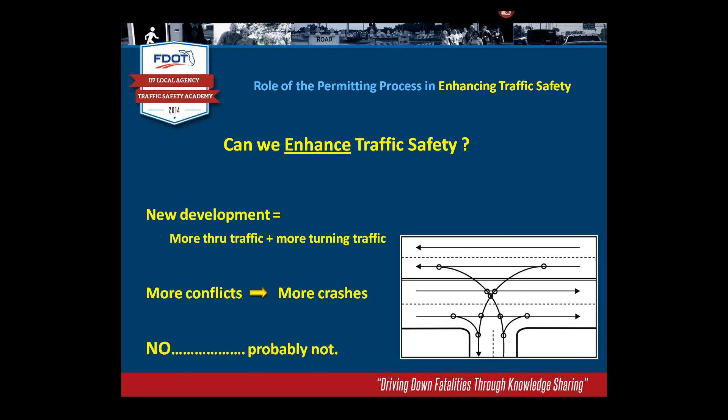So it's going to be difficult to improve on traffic safety during the permitting process, so we probably can't do that. But certainly we should be able to mitigate the impacts of new developments on traffic safety. And the way we do that is addressing the access management features that go into a development's access. The driveways, for instance: determining the right number of driveways, the proper location and the proper design of the driveways; turn lanes, whether or not turn lanes are warranted, and if so, how long they need to be.

We need to address median openings. It might be that we need to adjust a median opening, change it from a full median opening to a directional, or possibly close a median opening. We may need to close a median opening so that we can lengthen that left turn lane. Maybe it's just adjusting a median opening or relocating it a little further away or towards the development.

In Florida, whenever we affect median openings, we certainly want to make sure that the businesses and the property owners are aware of the median opening change. So we contact the property owners, and actually in our district we put up a little sign at the median opening so that folks know there's going to be a change there, and they have the opportunity to call and talk to us about that change. And if the development's large enough and generates enough traffic, maybe a traffic signal is the proper design feature that needs to be added to the roadway.

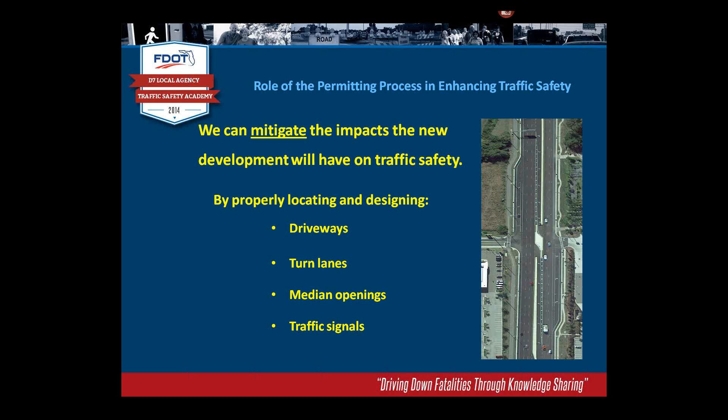So how do we go about mitigating the impacts? Well, we have to have a plan, and the plan we use typically is the traffic impact study. So one of the major topics today is traffic impact studies. And after the traffic impact studies, I wanted to go over how you can find some of the DOT references we're going to be talking about today. That won't take too long, but I will go through these references so you can find them easily.

And then the last little section, I call it Stung by the Standards. I'm not sure if that's the proper title or not, but it's really just some observations I've made over the years and some thoughts I have about some of the access management features, and I'll spend a little bit of time talking about those. This last little topic is really for your consideration. Again, it's really thoughts that I have.

So the first topic is the traffic impact study, and if you work for the DOT, as far as I know, we only have two documents that really speak to traffic impact studies.

The first, I've already mentioned a little bit, is Rule Chapter 14-96. If you're not familiar with the Florida Administrative Code, it has a number of divisions within the code, and division number 14 are the DOT, the Department of Transportation numbers. So anytime you see an FAC 14, that's going to be a DOT rule chapter.

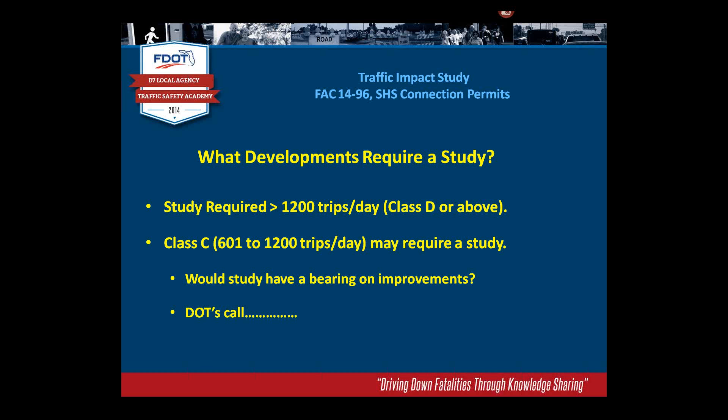The rule chapter also mentions the Class C permits, which are permits where the daily trips are between 601 and 1,200 trips a day. And you can require studies for the Class C permits, but we usually don't. We really haven't found them to be beneficial at all. But it is the DOT's call if you think there's some benefit that you can gain from those particular studies. And the rule chapter also talks about signing and sealing the studies.

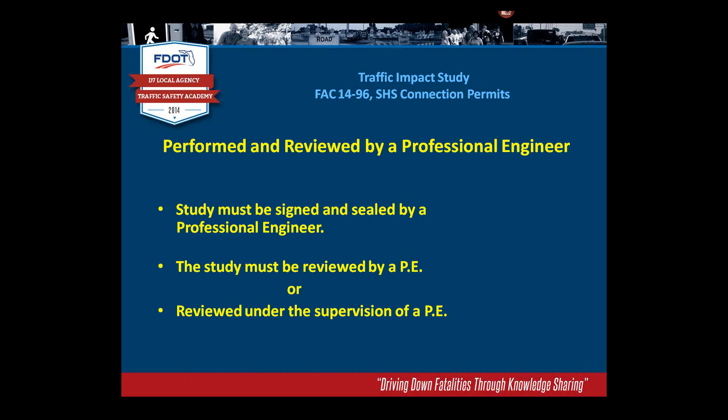The studies have to be signed and sealed by a professional engineer. After all, they are a traffic engineering study. And since they're signed and sealed by an engineer, the rule chapter also states that they're supposed to be reviewed by a PE. If they're not reviewed by a PE, then the study should be reviewed by someone under the supervision of a PE. Pretty much common knowledge, but that is specifically mentioned in Rule Chapter 14-96.

There's a little bit of information on trip generation. When the applicant submits the driveway application or connection permit application, he has to show the estimated number of trips on that application, and he has to show us which land use code from the trip generation manual he used. So that's good information to know. And again, the information on trip generation does mention the ITE Trip Generation Manual. I'll talk about that a little bit later on.

It also tells the applicant that when they're estimating the traffic, they should estimate the peak hour trips too. Usually the peak hours are going to be the morning peak hour and the afternoon peak hour. They should provide those estimates not only for the peak roadway times, usually the morning and the afternoon, but also the peak times of the development. Sometimes they're the same, sometimes they're not. So it's good to identify up front what information, in this case, the DOT will require from the developer, and we'll mention that a little bit later on too.

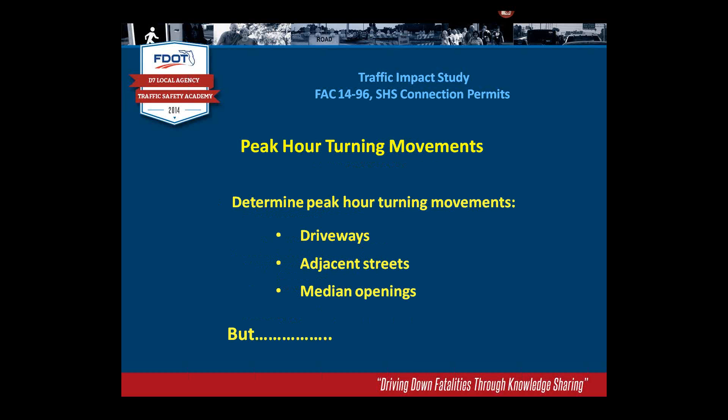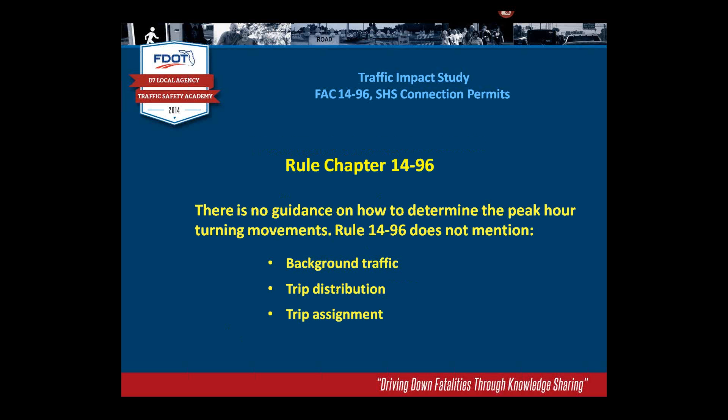And really the last bit of information that's required from the traffic impact study, according to Rule Chapter 14-96, is the applicant is required to determine the peak hour turning movements for all the critical locations or intersections. So that would be the driveways, the median openings and the adjacent streets. But this information really isn't very detailed, and it never tells you how to even collect this peak hour turning movement information. There's really no mention of the background traffic or the existing traffic at these locations. No mention of the trip distribution or trip assignments. So in that regard, it's certainly lacking information, and it would be very difficult to complete a traffic impact study with the guidance that's in Rule Chapter 14-96.

As far as analysis and mitigation, I'll just read this, but the only time it's mentioned, it states that the study must include a traffic operations analysis of sufficient depth to analyze the impacts of the development on the surrounding transportation system. Well, that sounds good, but what does that mean, and how do you go about analyzing that information? So we really need more guidance.

Fortunately, we do get a lot more guidance, at least on the determination of the traffic volumes, in the planning document, the Transportation Site Impact Handbook. This handbook covers a lot more than just the permitting that we're talking about today, but it does have a good chapter on traffic impact studies, with a lot of detail on the data collection and estimating the traffic volumes. But when it gets to the analysis and the mitigation, it really doesn't offer a whole lot. But I would like to go through the steps that are in the Site Impact Handbook.

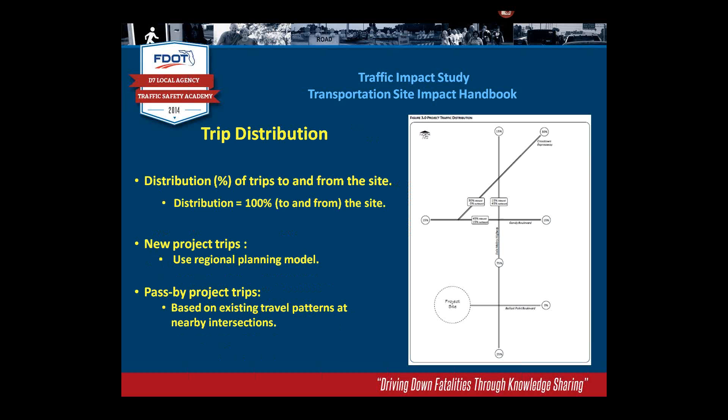So when you get through with the trip distribution, you should have something similar to the drawing you see on the right-hand side that shows the percentage of the trips and where the trips are coming from and where they're going to. Now, after you have the trip distribution and you have an estimate of the number of trips generated by the site, use that information to come up with your trip assignment. And this is the project traffic.

So you determine what the project traffic is going to be for each of the turning movements at each of the critical locations. So you determine the turning movements then for the driveways or individual driveway, the median openings that might be affected, and also the intersecting streets. And once this step is completed, then you should have a drawing that pretty much shows all the turning movement counts and the impact that the traffic only generated from the site will have on these intersections.

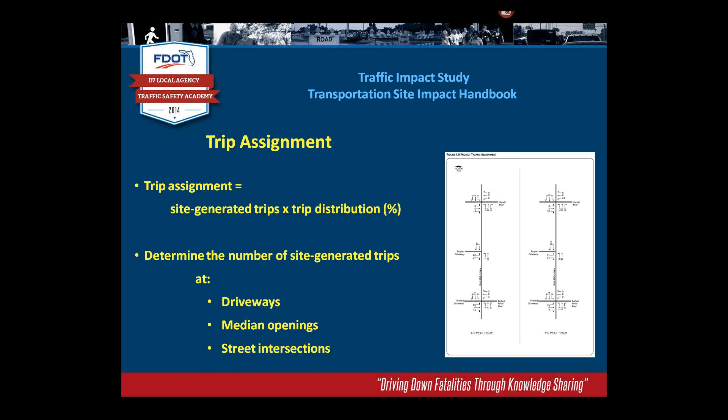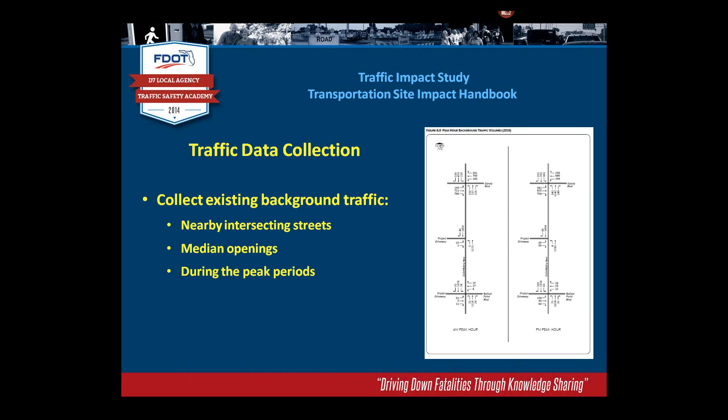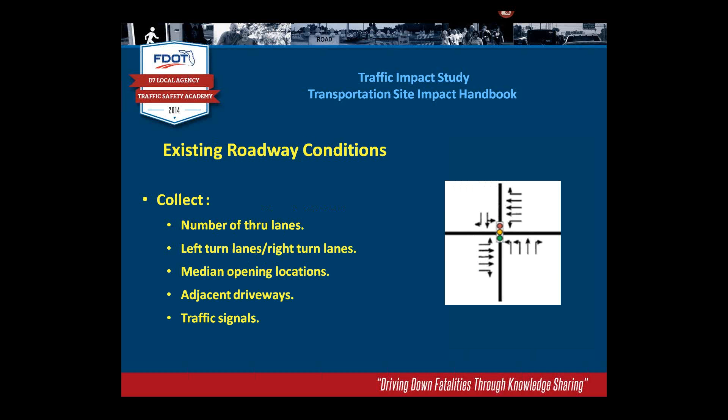Other information you'll need in order to be able to complete your analysis, you need to collect the existing roadway conditions. So you need to know the number of lanes along the roadway, if there's left turn lanes, right turn lanes, how long the right turn lanes might be, how long the left turn lanes might be, where the median openings are located, the distance from adjacent driveways to the proposed driveway or driveways, and the location of the adjacent signals in the area.

And that's really the last step in the Site Impact Handbook that frankly is of any real value. There's two other steps. One of them is called the Access Management, Site Access, and Internal Circulation step. Basically, it tells you that you need to assess the safety and operational impacts of the development, but again, doesn't really tell you how to do that. Just tells you it needs to be done. And then the last step in the Site Impact Handbook is the step on mitigation. And there again, it pretty much tells you that if you got a problem, you need to mitigate that problem. But it really doesn't tell you how to do that.

So reviewing the Transportation Site Impact Handbook, again, and I won't repeat this more than one more time, very little guidance on analysis and mitigation. And in fact, it missed another step, or at least I never could find this step. It's an obvious step, but I never really could find the step where you would want to combine your background traffic with your site traffic so you'd have your total future traffic at each of the critical intersections. That's pretty much understood, but I really couldn't find it anywhere in any of the steps in the Site Impact Handbook, so you just maybe need to be aware of that.

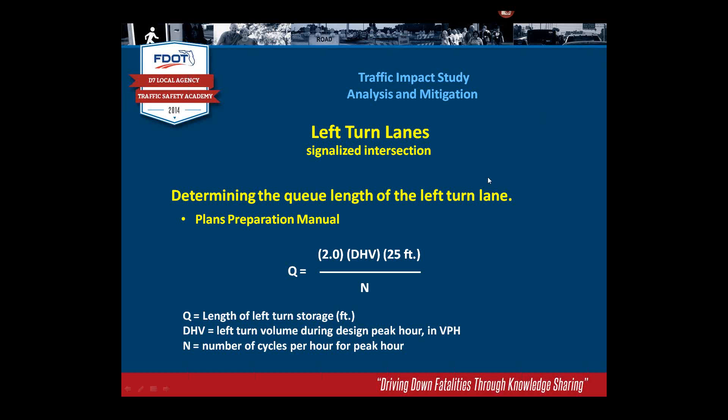and you say then that the queue length for storage needs to be the number of feet of a typical vehicle, 25 feet, times the number of vehicles. In this case, we won't do the math right here. I was going to do it actually on the next slide. But you multiply the number of vehicles times 2, and then multiply that by the 25 feet to get your queue length. I suffered through that. I should have just gone straight to this example.

Yeah, here in this example, it's called the DHV, the design hour vehicles, but we're talking about left turn vehicles. So in this case, we're going to assume there's 100 left turn vehicles during the peak hour, and assume that the cycle length is 180 seconds per cycle. If you divide the number of seconds in an hour, 3,600 seconds, by the 180, then you'll come up with 20 cycles. So 20 cycles is your N value. You divide the 100 by the 20, so that means there would be 5 vehicles arriving every cycle.

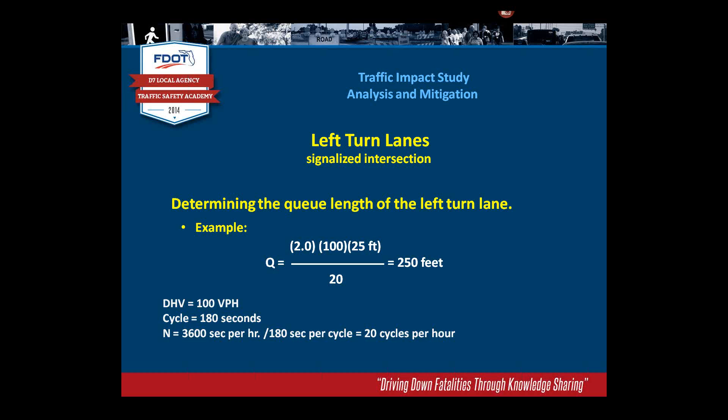And then to be on the safe side again, go ahead and double that. So that's 10 vehicles. 10 vehicles times the 25 feet per vehicle is 250 feet. So in this example, the queue length would be estimated at 250 feet. And that's for a signalized intersection.

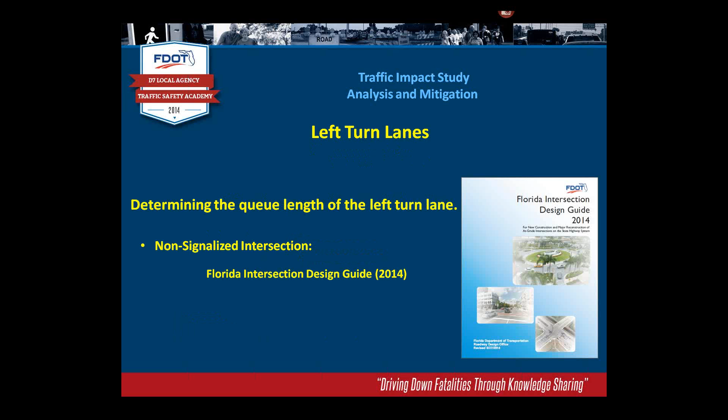Now for a non-signalized intersection, the Florida Intersection Design Guide has a formula, again, that's easy to use. And from what I know, most people seem to use this formula. And this formula is based really on the number of left turn vehicles that arrive in the left turn lane within a 2-minute period. So the formula then is the design hourly vehicles divided by 30, which is the number of 2-minute periods there are in an hour. That'll give you the number of left turn vehicles per 2 minutes, multiply that by the 25 feet per vehicle, and then that gives you your queue storage.

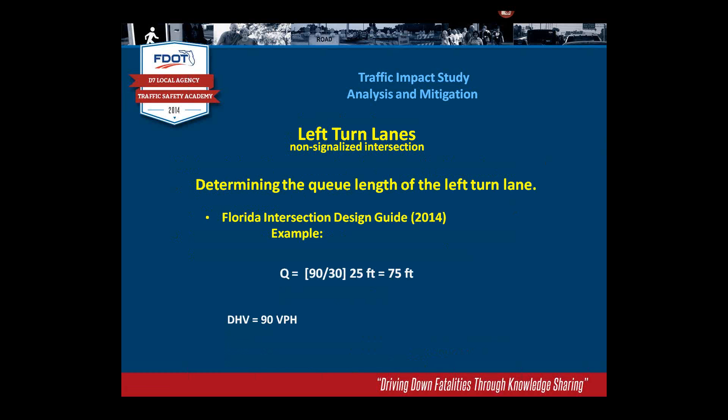Again, an example of that might be, let's say we've got 90 vehicles that are making a left turn at a median opening. That would mean in a 2-minute period, 90 divided by 30 is 3. There'd be 3 vehicles making that turn. So you multiply the 3 vehicles by the 25 feet, and so you use a queue length of 75 feet. Now, I didn't go into the decel and the taper on the left turn storage lengths. Obviously, we'd go back to standard index 301 and go through the same process we did for the right turn lanes to come up with the total left turn lane length.

So that pretty well covers, I guess, our analysis of right turn and left turn lanes. Just like to make a few comments about median openings. There's no real warrants for median openings. Certainly we have our design spacing standards, and we want to try to follow those standards wherever we can. But ultimately, our decision really needs to be based not necessarily on the numbers, but on sound engineering judgment, experience, whether or not motorists will be safer, and whether or not it'll be more operationally efficient to have a median opening or not, or to relocate the median opening or not.

For me, if there's no full median opening and somebody's asking for a full median opening, I try to stay away from new full median openings. If there happens to be a situation where we know we're going to have to signalize the new median opening, well, certainly you're going to need to put in a full median opening, but I generally want to stay away from full median openings that don't exist today. And the option a lot of times to me is the directional median opening. We'll talk about that a little bit later. In fact, I think it's about the last thing I talk about today.

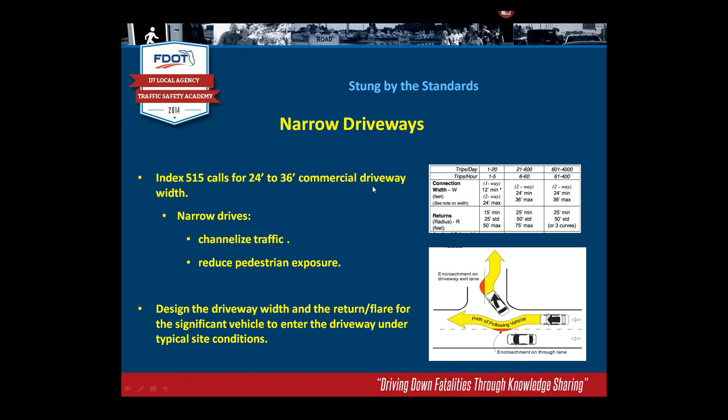And there's good advantages, really, with keeping the drives relatively narrow. You're able to channelize the traffic a lot better. You're able to reduce the exposure pedestrians might have while they're crossing the sidewalk. That's all good. But sometimes we run across some conditions that really just aren't typical. And frankly, I had to frame this particular example. I couldn't find any of these conditions. We've had the conditions discussed during design, but I don't know if we've really constructed any. But just wanted to make you aware of this.

The typical site conditions that you see in a lot of our manuals and maybe presentations that you've seen, they're usually perfect. I mean, usually the site is a perfect square, perfect rectangle. It's plenty large enough for all the features that need to be within the property.

And that's the way it is most of the time, but there's plenty of times that folks try to fit businesses on properties that frankly just are too small, or it's an odd-shaped piece of property. And so that creates a lot of circulation issues, and then also creates issues maybe with the throat depth. You might hardly even have a throat depth because of the way the property is designed.

And so, for instance, in this particular example, and this is something that had come up on some design projects, you've got the fueling stations very close to the right-of-way, and the aisle between the fueling station and the right-of-way is very narrow. And for a vehicle to come out, if they come out and pull up far enough, they're probably going to be out of the way if you have a 24-foot drive.

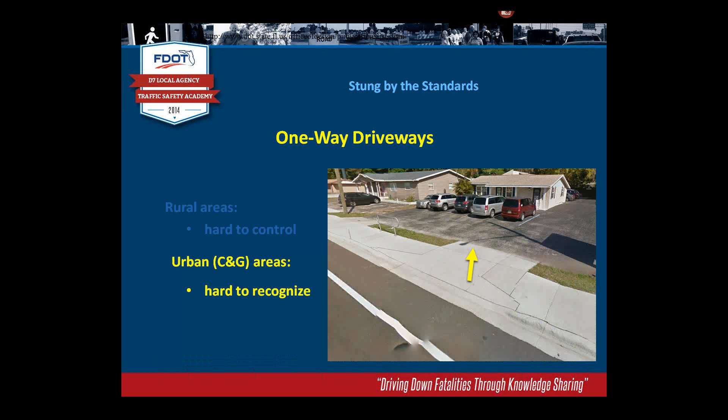And then obviously this driveway doesn't have any of the signs or pavement markings that should go along with a one-way driveway. The driveway next to it, to the left, is supposed to be a one-way driveway too, a one-way out. And obviously it would be impossible for people to really recognize it that way.

The concrete pork chop island, don't really need to say a whole lot about it. They're supposed to discourage left turns into driveways, left turns out of driveways. If you do not have a restricted median, if you don't put in the concrete island, you can put in the painted island, and probably you'll even get less people paying attention to what you want them to do, to stay away from the left turns in and left turns out.

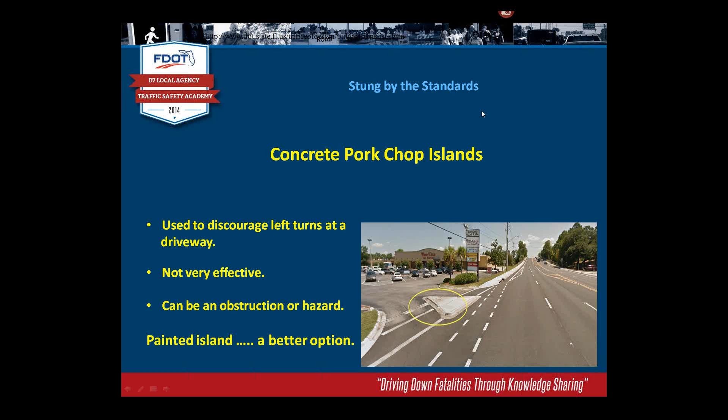And then the next features I wanted to talk about were the continuous right turn lane and the separate right turn lane. If I had my preference, I'd always use strictly just the separate right turn lanes. But we have conditions out there that, at least in my opinion, maybe the continuous right turn lane is a better option than the separate right turn lanes. Regarding the continuous right turn lanes, I know some references discourage their use.

The only thing I remember reading about the continuous right turn lanes is that you may encounter situations where motorists get into the right turn lane, have their turn signal on, and the motorist coming out of the next driveway thinks they're turning into their driveway, so they pull out and they get hit with a right angle crash as they pull out. The vehicle with their signal on was actually intending to go up to the third driveway or a driveway further away. I guess that's always possible, and maybe it happens, but I'm just not aware of it happening, or really even happening a lot for that matter.

But I am aware of some conditions that we've had with separate right turn lanes that really made life difficult. In fact, there's been several locations in northeast Florida I know where we've had enough problems that we had to eliminate those problems. So with the separate right turn lanes, what we have encountered is that you'll get motorists entering the first right turn lane thinking they're going to the second right turn lane. And then when that happens, they'll do one of a couple of things. First of all, as soon as they realize they're in the wrong right turn lane, they'll dart back out.

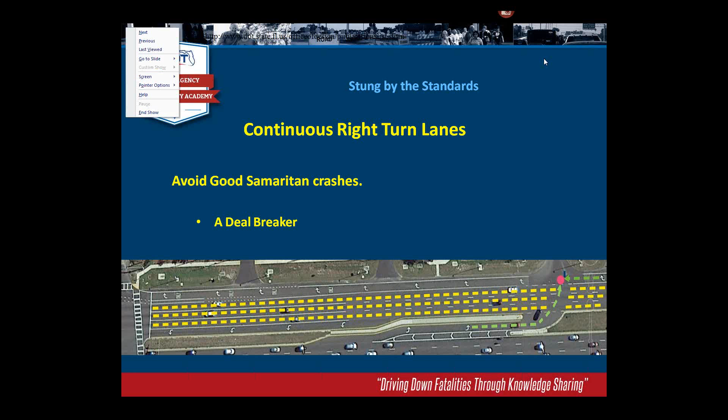Now, the next item I wanted to talk about really was non-standard length turn lanes, either left turn lanes or right turn lanes. I know from time to time I hear folks say that they won't install anything or won't allow anything except the standard length turn lanes. And certainly that needs to be our first option, our first consideration. But plenty of times, for a variety of reasons, we cannot install the proper length turn lane.

It might be within a median where you want to lengthen a left turn lane or install a left turn lane, and you just can't get the 185 feet maybe plus the queue that you might need for a 45-mile-per-hour speed limit. So you put in what you can. I mean, ideally you put in the entire left turn lane length as required using the proper queue and Index 301. But if you can't do that, at least it's nice to try to get the queue length in. That way the through traffic won't be running into the back of the last stopped vehicle.

And even if you can't get the queue length in, especially for the right turn lanes, if it's smaller, we'll accept a smaller right turn lane in our district if the turn lane lengths don't meet the design standards. Now, the engineer of record, the engineer working for the applicant, is going to have to come in and write the design variation. And as far as I know, every time one's been written, it's been approved by the district design engineer.

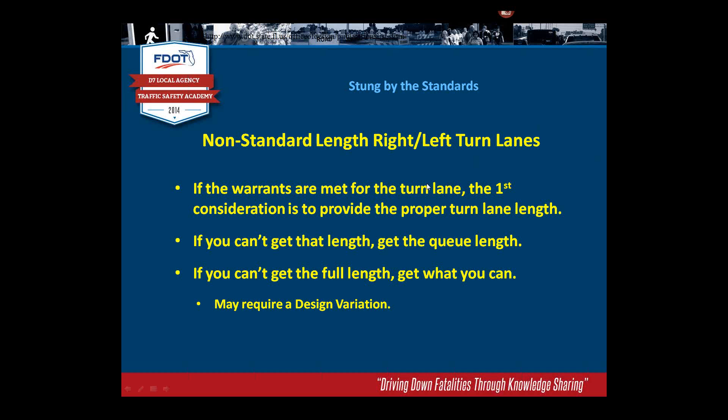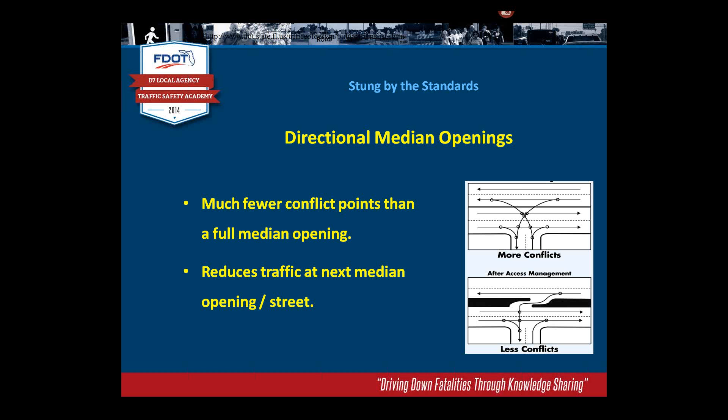So I understand why we need to space our median openings out based on the road classification, and really primarily due to the speed limit. But I still think there's a lot of opportunities where the directional median openings have a lot of value. Now, we haven't really mentioned this procedure. In fact, there's just one procedure on median openings that the DOT has, and that procedure, I'm pretty sure it's in the planning side of business.

That's the procedure that discusses when you should consider installing a median opening, when you shouldn't. It's also the procedure that mentions the Access Management Review Committee and sets the ground rules for the AMRC meetings. And what the procedure says today, it says that deviations for directional median openings do not need to be reviewed by the Access Management Review Committee. So I hope I'm interpreting this right, at least based on the old procedure.

But if you have a location and after you've studied that location you determine that the directional median opening is the proper feature at that location as opposed to another type of feature or no feature, then you don't have to meet the 10% rule requirement where you shouldn't deviate full median openings by more than 10%. If you deviate by more than 10%, then that's okay as long as you've done the proper study to prove that's a good design.